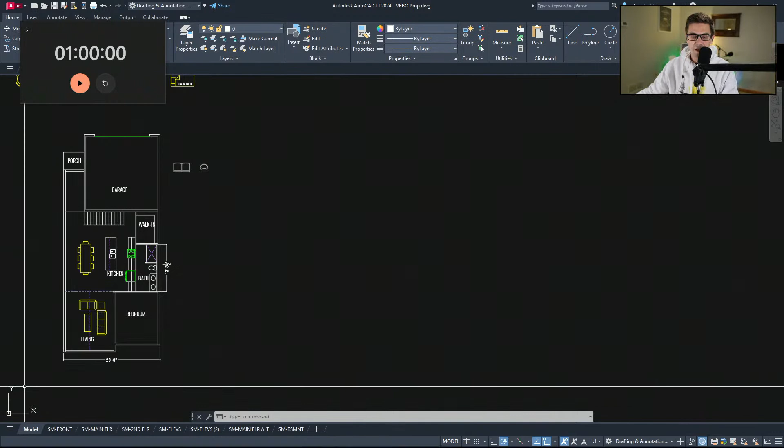We're ready to go. All right, 2-story with a 2-car garage, Scandinavian. Well, let's just start with the garage - 24 by 24, outside dimensions. Pretty good standard size garage for that space.

Okay, and let's show a garage door here. We'll do 9 feet each way, so that's a big 18-foot door. Okay.

Now we need some floor plan. If you're wondering, I've been doing a lot of these live streams, so I have a lot of them all in the same file. Makes it nice and easy to work with.

So we're working on a 2-story Scandinavian, under 2,000 square feet. I'm kind of liking the idea - this just popped in my head - what if we did like a mudroom entry separating the garage? Oh, that's going to be pretty big square footage wise though, isn't it? If we're going to stay under that area, we need to be really conscientious of our floor plan area, because you can't just go all willy-nilly on it.

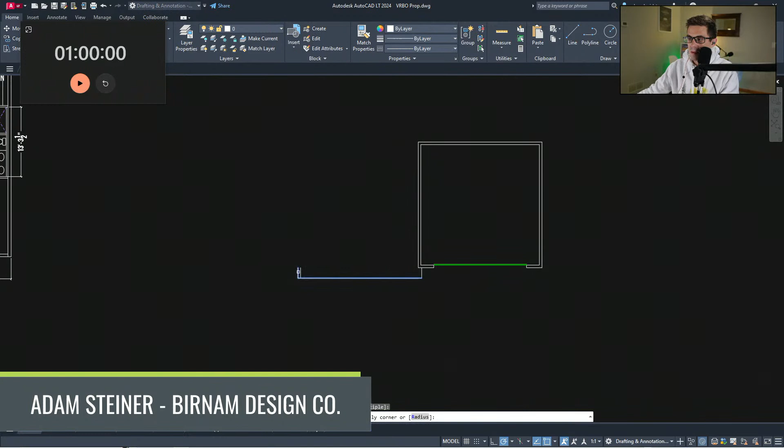So I'm going to draw some stuff.

All right, so one thing I'm thinking - I'll just describe what I'm thinking through. For smaller footprint homes, I'm going to assume you are wanting to be cost effective in your build. We could go crazy and build a multi-million-dollar 2,000 square foot house, but most of the time when you're asking for something square footage wise, you're wanting to save cost too. A big part of saving cost is to simplify the structure - nobody wants to pay for lumber. So let's get the structure as clean as possible.

So I've done a couple of - oh wait, so I'm showing 2x6 exterior walls here, and then a simple main floor layout for this.

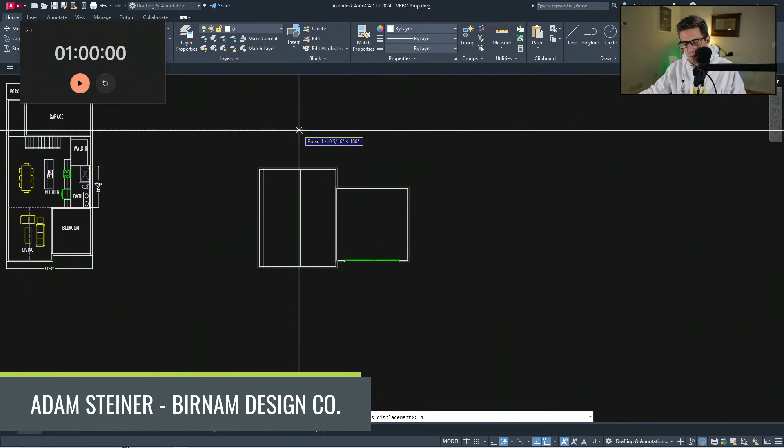All right, let's see what square footage that sets us at - 746. Okay, so we could go quite a lot bigger. And I'm 24 feet that way to that way.

So I'm thinking with these Scandinavian plans, I'll get into SketchUp. Oh, forgot to start a timer - we got to do this all in an hour, partially for fun, partially because Ludwig told me to.

Love the idea of mudroom entry from garage. Yeah, I will try to make that work if we can.

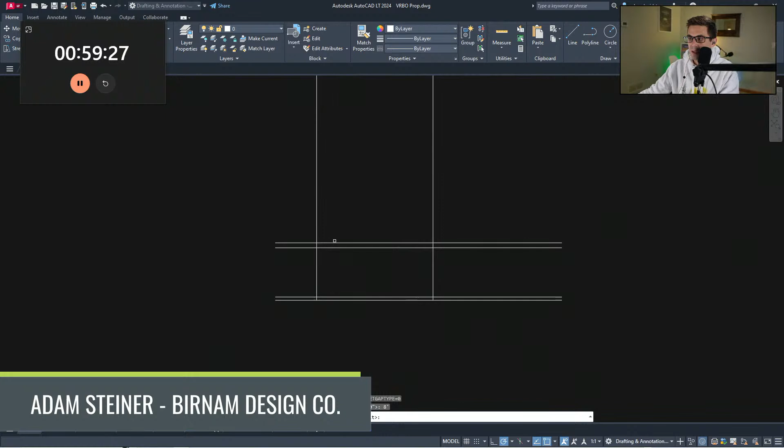Let's say maybe 10-foot ceilings on the main. So I'm drawing a quick section here just to see how it's going to look, because I never want to get too far ahead of my design with the floor plan. I always want those to stay in tandem if at all possible - I think that helps in design.

So even though I'm drawing this in SketchUp later, I'm trying to think out what would be the best way to do this. So I could do garage here with a little dormer on it, you know.

Does that make sense? And have this be something cool. I don't know, Melissa says 2,000-ish if that helps. I mean, bigger is always easier.

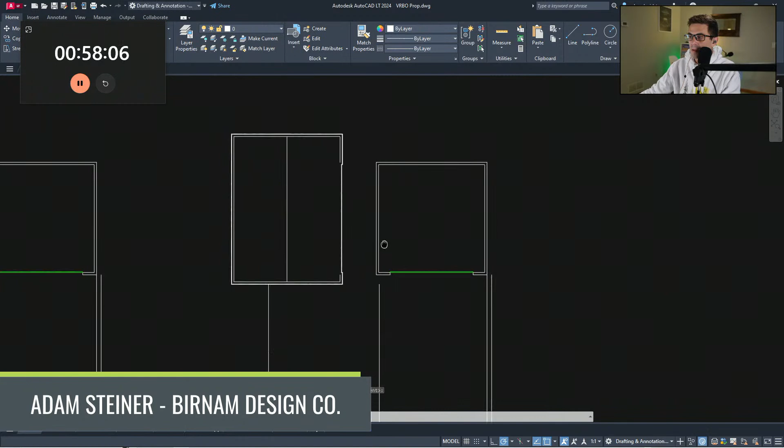But sometimes small footprint floor plans lead to the most fun. So what I was thinking earlier too is, do we separate these components? And let's say here, it's going to add a decent amount of square footage. But if I pull this out, and then do like a breezeway. Not really a breezeway, that's not the right thing.

What word am I looking for? This would be just like mudroom, maybe pantry as well. Maybe this is front porch too. It's not the most simple structure in the world, but what this does for us, especially on this Scandinavian style that we're going for, is now I can do 2 of those roof components like so, and separate that with just a really simple front porch. And then structurally in here, what do we got?

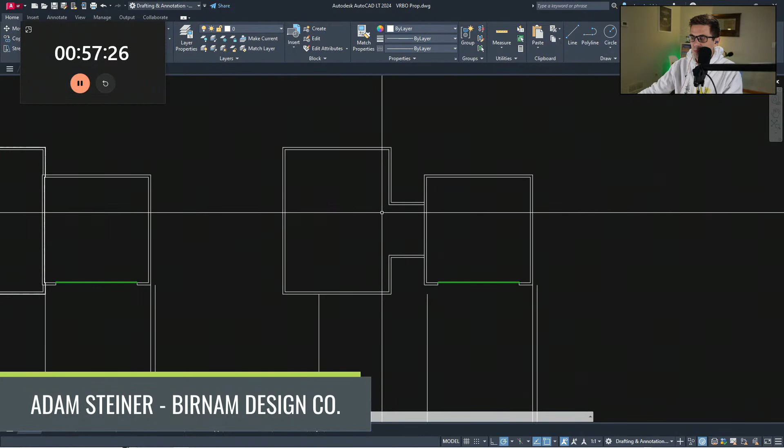We wanted a covered back porch out back too. So we are 23 feet inside to inside. Let's grab some furniture just to start.

How big is this main floor? I'm seeing if it's wide enough to do like the dining area and the great room across the back.

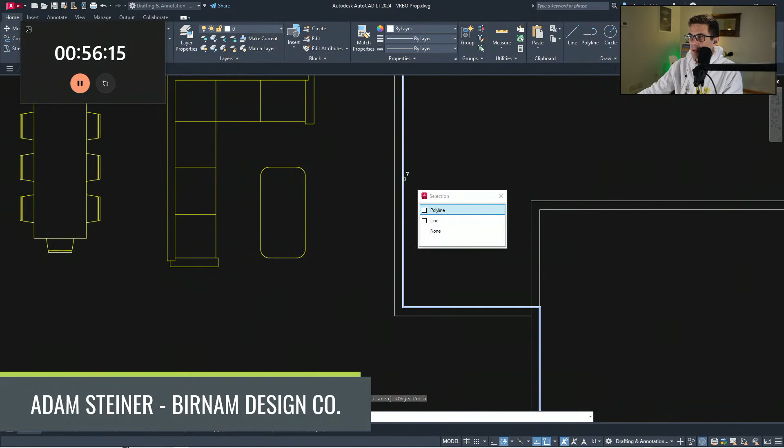862. Okay, we could actually go wider with that. Let's go 2 feet wider, and then we'll go 4 feet back. And then, okay, so that gets us a 1030, just above 1,000.

And then maybe, so coming 13 feet off of the back, maybe 15 feet. Let's start that kitchen.

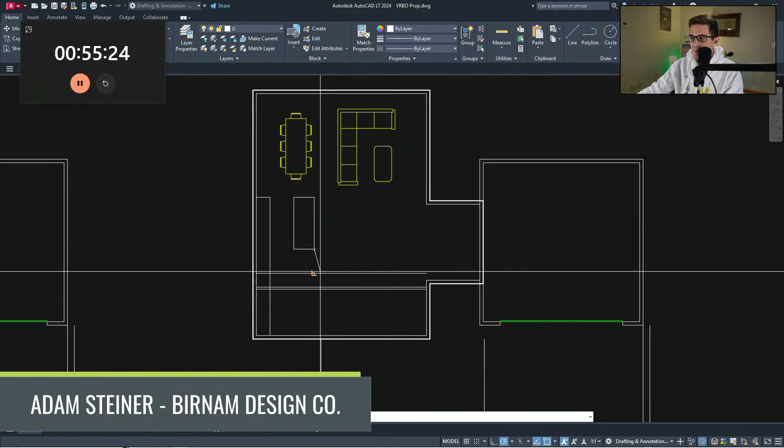Okay, I'm showing 24 inches deep for all the counter space. That's very, very common. And then I'm showing 36 inches for the walkways. That's my personal low end standard, like that's the narrowest I'll show. I still feel like 42 inches though is a really good working width, but on a smaller footprint floor plan, you want to save square footage wherever possible. And so doing something like that will really help.

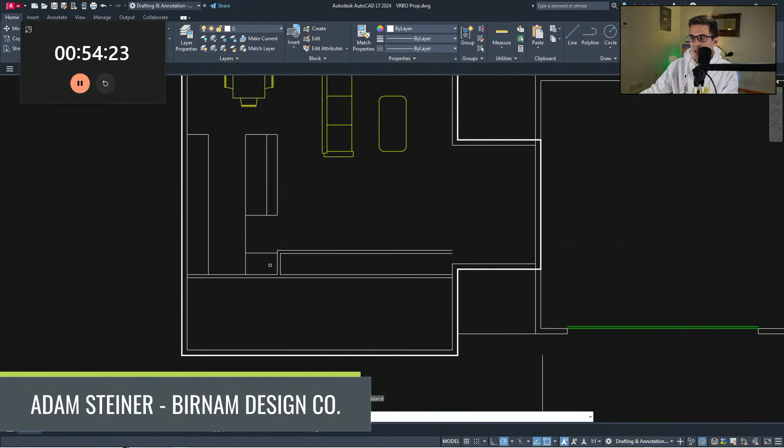All right, so this is going to be combined mudroom. Whatchamacallit? We need stairs. I think this area probably be open to like a pantry up front here. And then if this is our main entry door, maybe we could do office over here and just leave this all open.

Oops, wrong buttons. Okay, let's get some text in here to start to explain what we've got going on. Garage. Mudroom. Little office. We need stairs up. Don't let me forget stairs up, please, chat, or this is going to get awkward.

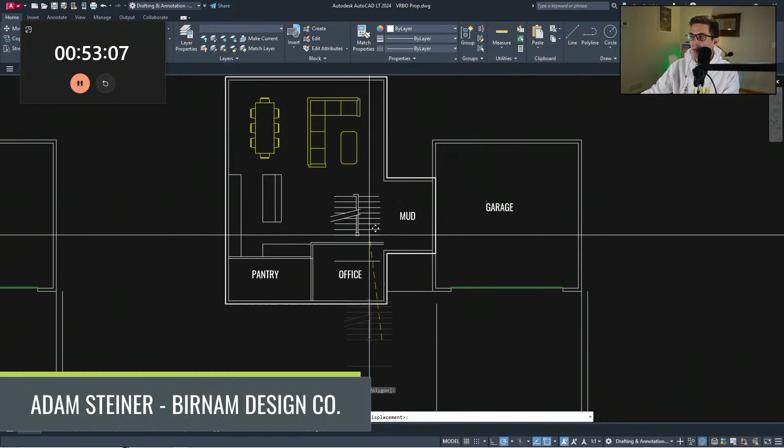Where can we put those stairs? Let me grab a... So I use this room layout guide. I actually sell it on my website, if you like working in AutoCAD or even want a PDF copy. It's got a bunch of options for you on like just my standard, most common layouts and sizes. But it also makes it easy to work with floor plans, because you can see really easily what does and doesn't work.

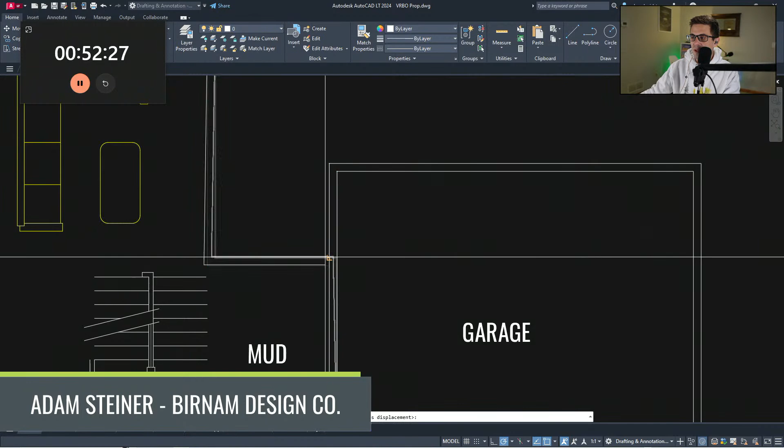So I could possibly put those there, right? Do you have tutorials on YouTube? I wish, that's actually a long-term goal of mine, is to do like a design course, SketchUp course, AutoCAD course, all that fun stuff. If you follow along the YouTube, you can see a lot of these floor plan design sessions, and you can get a decent feel for how I would design things. If you want to go that route, there's a little bit of digging though.

Do I like that? So the stairs be open to the foyer. Foyer mud. No, it kind of constricts the floor plan some. What if we did like a straight shot staircase off this back wall here? No, that's not going to work either. Let's go back to our U-shape staircase.

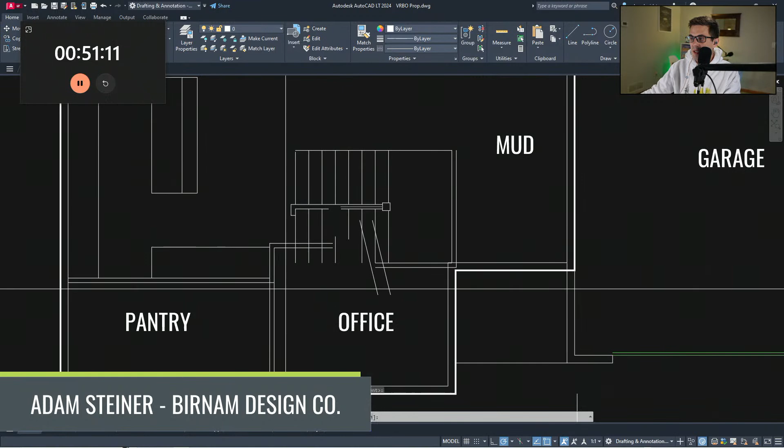Oh, this needs to go out. We slide the door to the office some. That could work, we don't need to pull this wall back as far then. Could be mud entry. And the stairs down, we could either do basement or just have the understairs be a closet if you're not doing a basement. Okay.

So let's see here, let me clean this up for you for a second.

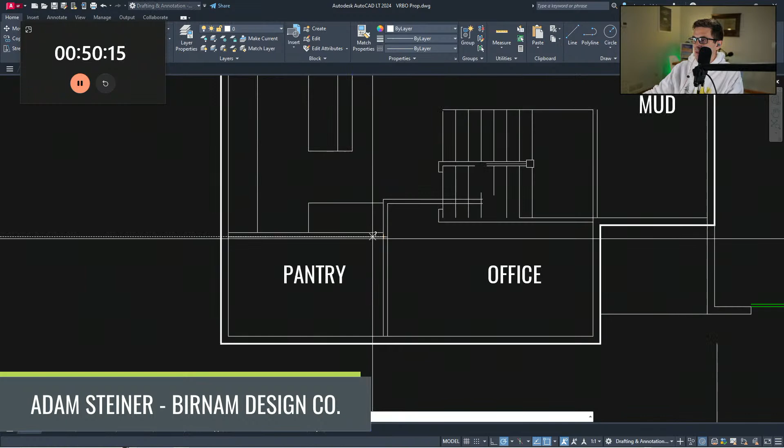That gives us enough room to get into that office. Where would you put bedrooms upstairs? Do you have enough to put a bedroom here? 10.7 by 5. Yeah, okay, we could put a bedroom there. And then bedroom there and bedroom there. It's getting kind of cozy though.

What if this came back just a couple more feet? And this came out just a couple more feet. Could we get it big enough? 9.8 by 5. Could we get it big enough so we could put a bedroom above the office and the pantry? That'd be nice and clean and easy.

18.5 by 5. You could actually do 2x12s through here. You'd have a big LVL though, coming through there, which isn't the most clean structurally, but it's also not the worst. Neither the worst nor the best.

Okay, yeah, let's define our office some here.

If you were looking for a tutorial on YouTube, what would you want? Do you want to know how to work the software? Or is it more important to know good design and stuff, or how to think through structure and roof plans and all that fun stuff? Here's some newel posts - this is what I'm playing with right now.

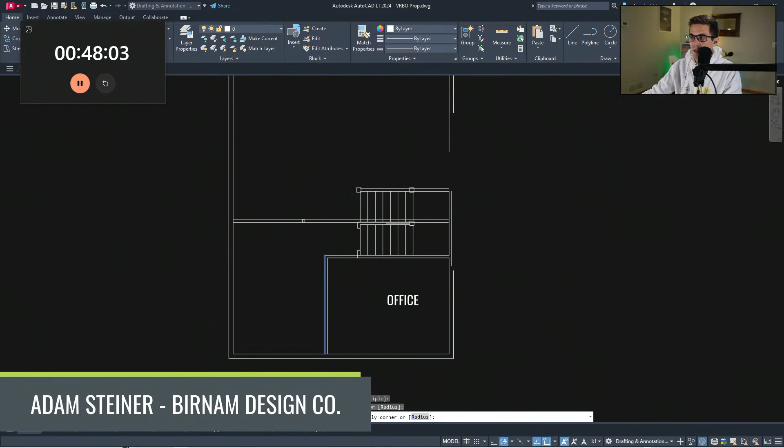Okay, so then let's go upstairs. So then upstairs, we could have 2 bedrooms. Still probably need that little hallway return. So this would be bedroom, and then that would be bedroom. And then we could do laundry right in the middle here.

Oh, you'd actually have a lot of room for then like your primary suite, because it could be all this space. What do we got here? Yeah, 14.1 by 18.2, that's really good. Actually, probably too big for this size house. So maybe something goes there.

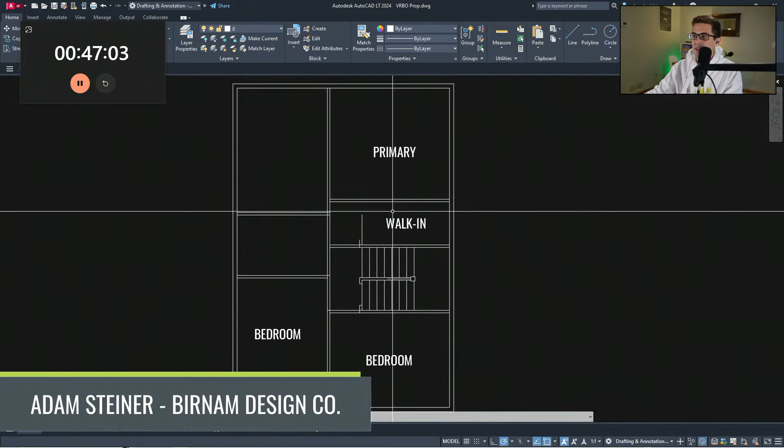Maybe this is walk-in, what do you think? Oh, the bath is huge then. If this becomes walk-in, then this is all primary bath. Oh, you know what?

Speaking of baths, we need 2 more baths in this actually. We need one for the kids' bedrooms. See, going fast, it's easy to forget stuff. So that'll be... oh yeah, we still got room for all this. So that's bath 2. Laundry there.

Okay, that actually works out pretty cleanly. We do need to figure out a space for a powder room. Although the pantry got gigantic, it doesn't need to be that big.

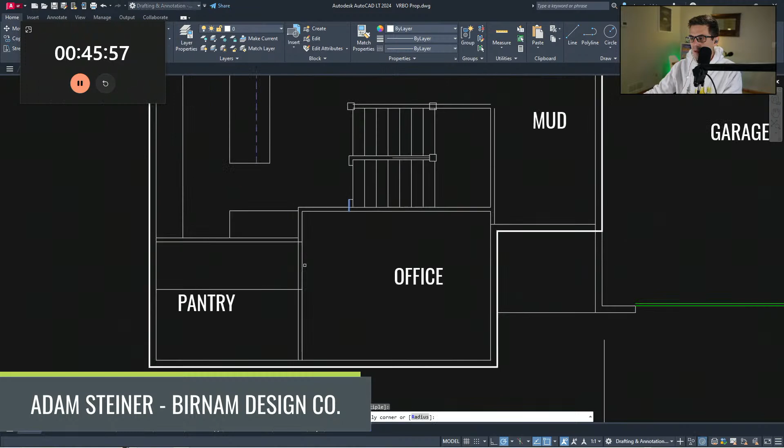What if there's a little hallway coming down here? And then our powder sits there. Oh, I like that, okay. Pantry. Powder.

Thoughts? Love it, hate it. Where we at, gang?

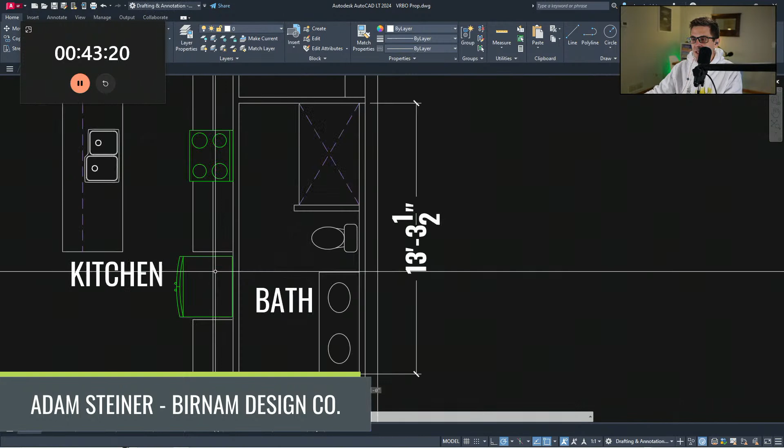Love a Long Island pristine no sinks appliances. Okay, so let's talk about that - I was actually trying to do that in this kitchen, and we have this nice exterior wall here, but I'm running low on wall space. Like, I don't want to put the range here. That countertop is only 5'1", so it's not gonna feel good, and it's kind of far. So I can recess that fridge in a sec. But could we put the sink and range on the same wall? Or is that going to feel weird? Yeah, it is going to feel weird.

There's not quite enough room in that kitchen. I mean, it would probably, like... I wonder if there's a better way to slice this up then. You know, maybe this... I don't know, maybe this area is pantry, and we put the range here. And then the fridge goes down here. That sink goes there. What do you think?

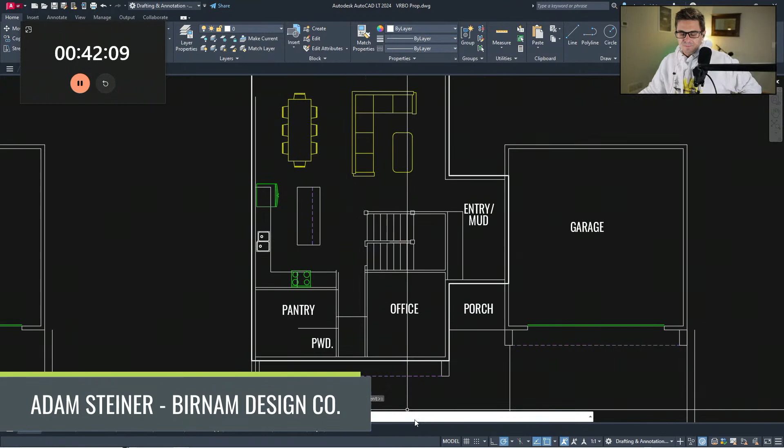Yeah, powder could be right here then. Oh, the pantry is still giant, which I think literally no one is objecting to. I don't think I've ever heard like the pantry is too big, could you please make it smaller? Yep, still haven't heard that in the design meeting.

Here for a giant pantry, says TikTok. Yeah, big pantry is good.

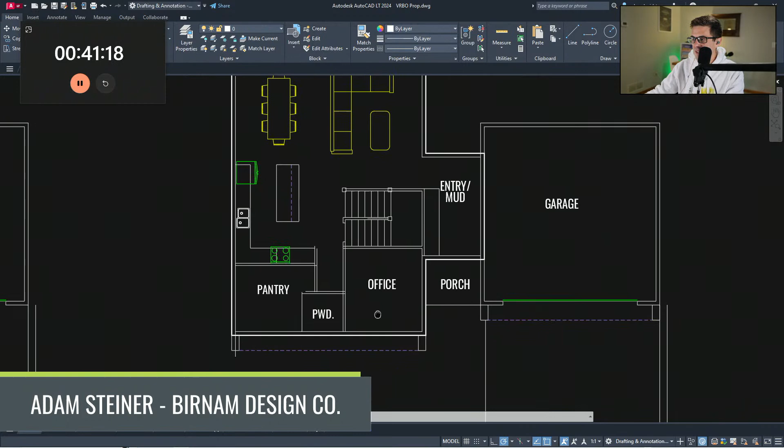Okay, are we approving of this kitchen layout then? Is that better? I do like that. Don't hate it. Office probably isn't going to get a closet, but I don't know that it needs one. 10'3" by 10'11", that's a decent size for a small, modest footprint plan. You'd do a door or window out the back here, and probably another door out the back of your dining area.

Okay, let's see here. These bedrooms are 10'7" by 15. Oh, that's really good size. And then 14 by 10'11". Oh, those are both good size.

So maybe a closet goes in here, front corner. I'm not going to finish these out because I think you get it. You're smart people.

I really want to get to the exterior to show you that as well. I think that could be fun. So we're going to switch to SketchUp here in a sec.

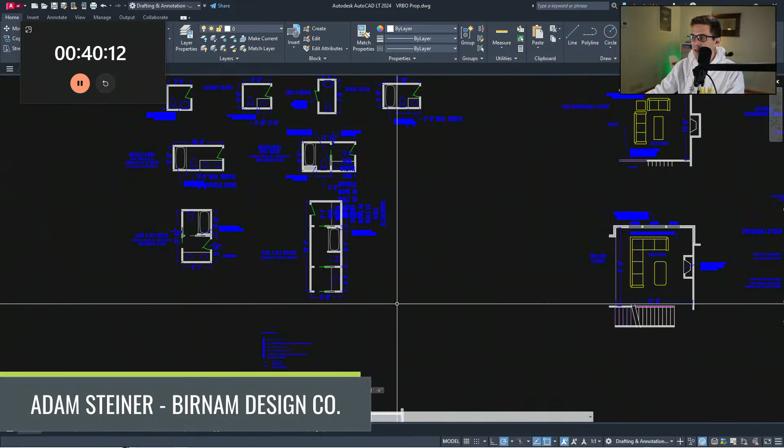So those are closets, bath. This bath then, 10'7", so you got plenty of room. Jumping back to the room layout guide, you got plenty of room to do like a double bowl, maybe even a divided bath actually.

Sorry, those blue icons, it's my standard plumbing icon color. Somebody on TikTok one time was like, yeah, those are super hard to see on the black screen. Oh, sorry.

Tons of room for laundry. And then I'm guessing on this size and type of home, a lot of these were foregoing a tub in that primary bath. This is a really good size laundry too.

Okay. No closet. No closet where? No closet in the bedroom.

Screened-in porch or covered deck. We want covered porch. Oh, you know what I think would be cool here? Is to like make it kind of wrap around, so it connects to that front mudroom area. I won't really be drawing the rear elevation though, so you just have to use your imagination.

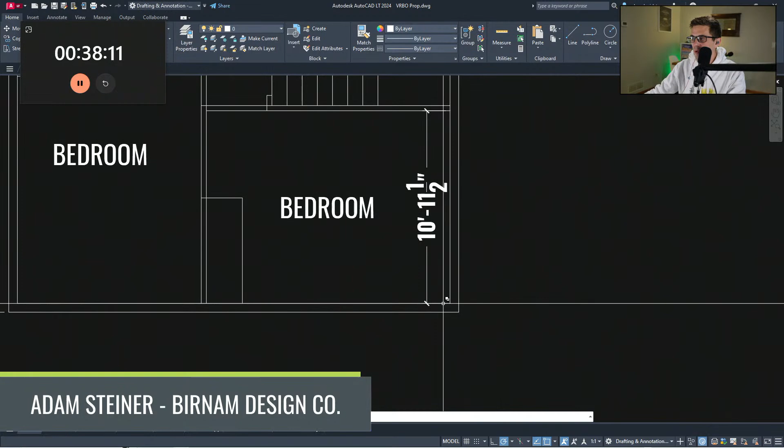So if you're doing like a Scandinavian home like this, we're probably going to do a lot of metal roof, which could be cool. If you're doing the metal roof, you can do super shallow, you could go down to like a 2:12. So that's probably a good option for you.

All right, and then for this primary bath, oh yeah, this is gonna be cool. Just do shower and toilet compartment, back it up on one side, and then giant vanity space on the other. You can keep this open, be like a glass wall for the shower here.

Where are my icons? Please don't protrude closet into the bedroom, you can be more creative than that. I actually think those work really well here and here.

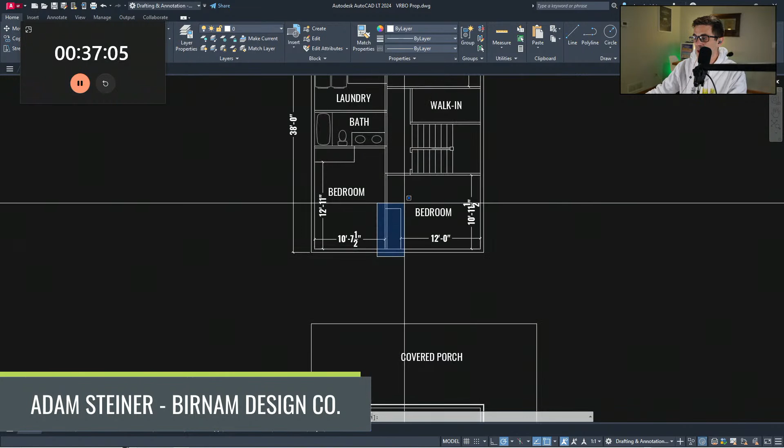Do you got a better idea? Because it'll create, both of these are the entrance doors then, right? So it'll create like a natural little alcove as you're walking into the room.

And then still preserves a bed wall. So the bed wall, let's grab this bed icon. This can be your bed wall on this one, and I actually think this would be your bed wall on this one. Do your egress window at the side there.

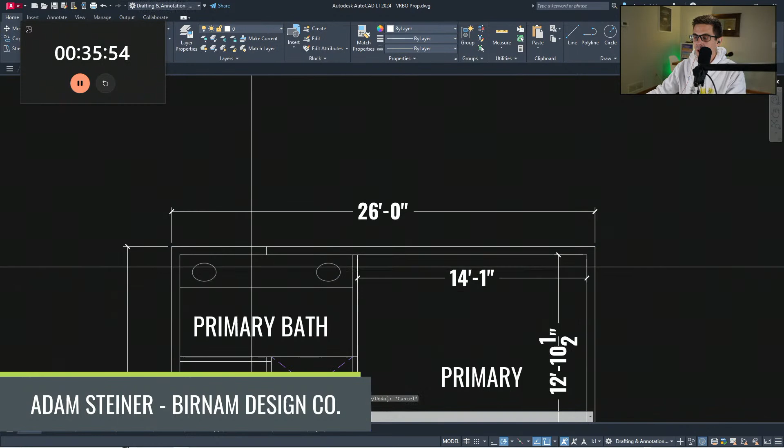And then you could do like a knee space or something in the middle here with a window off that back wall. Or center the vanities, and then do like linen cabinets or closets on the ends. Sorry, distracted by comments.

Okay, did we forget anything major? The only thing I can think of is like if we're gonna need to do a mechanical chase in this. Where would you do one? So it kind of depends on the type of construction. Yeah, because you could do like ERVs and stuff, and not even need to worry about mechanical chases. Maybe let's plan on that, because this is a live 1 hour session. Okay.

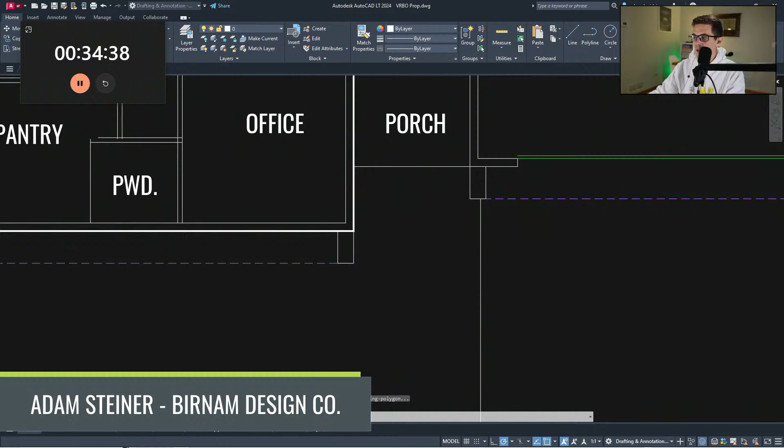Now what I want to do is like maybe a cool big window set here, and then a smaller one there, and accent that whole thing. I'll bring those out, each a couple feet. All right, sweet.

Let's get to SketchUp, gang. Close enough? Everybody can visualize this? Oops, I need to open a new SketchUp. Sorry, let me drag that off, another window. There we go.

So main block of our house was 26 feet by 38. Looking good, says TikTok. Thank you.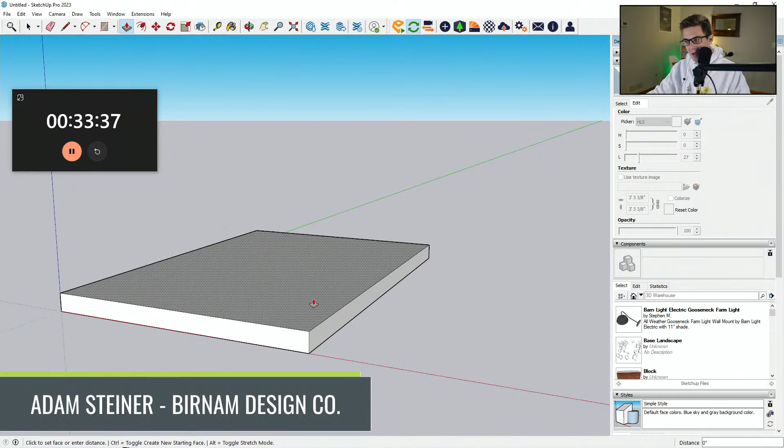Thank you for watching. All right, so I bumped up 8 inches for top of foundation, and then 12 inches for floor area, that'd actually be like 13 and a half. And then, you know, I had mentioned doing 10-foot main floor ceilings. I think because of the stair treads that I have, I'm going to stick with 9, I don't have a ton of room to do extra treads. So 9 foot, and then another 12 inches for joist space and subfloor, and then another 8 foot and 1/8. So that's our top of plate for the second floor.

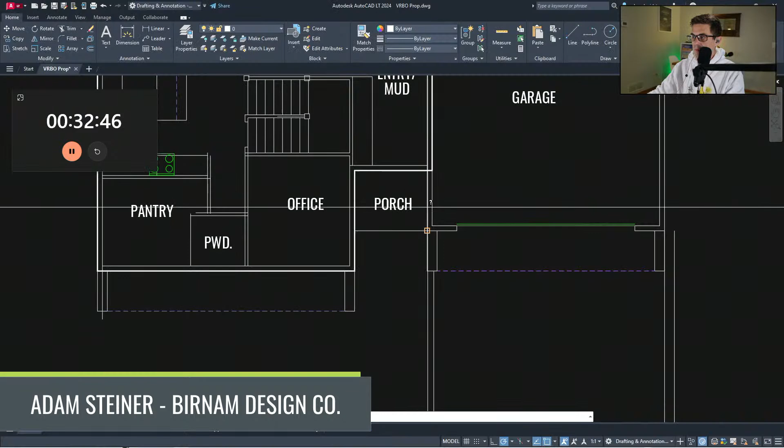Let's jump back over to AutoCAD. Is that right? 7'4" and 10 feet. 10 feet and then 7'4". And then 6 feet and 24. Sweet.

Okay, and I think this was a couple feet in. So again, up 8. And actually, okay, so that'd be our top of plate for first floor, kind of matching a 9-foot plate there.

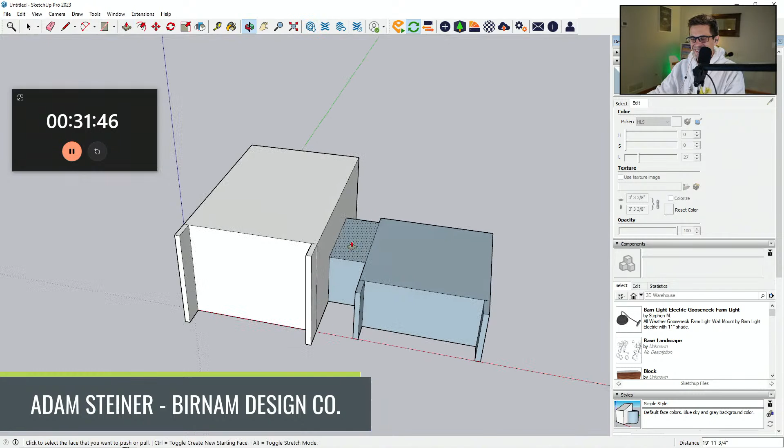Okay, I'm going to bring these out. Little like Scandinavian arms—is that the technical term? Yes. House fingers? Sorry, I'm a child, I know. Okay, got my house fingers.

Okay, and I'm going to do 12-12. I feel like a lot of these plans have a 12-12 pitch. Makes it nice and simple and clean and easy. And I'm actually going to come back through and offset this 12 inches. And then that should get us our main roof line here.

Check it out, starting to look like a house. I always like to go back and delete extra lines in SketchUp because I think it'll just save you headaches later. And I can just copy this. Now that I've made the form, I can just copy it over and delete a bunch of crap. Makes that roof really easy to do. See? Oops, then just have exactly where it was. Kind of a less thinking way to do it. And there we go.

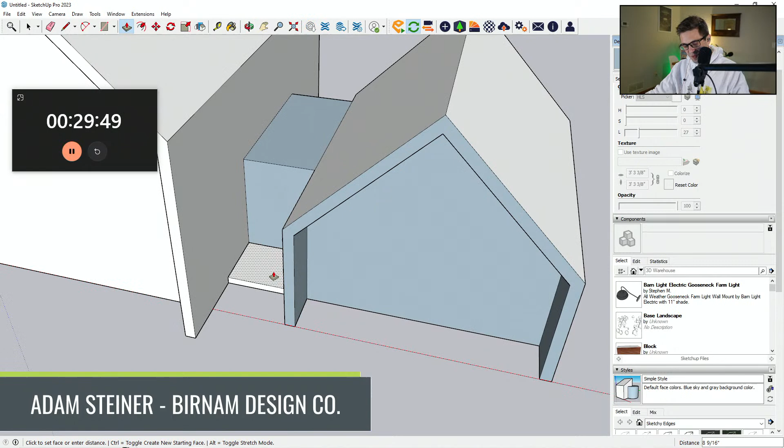This is what it looks like almost every day. The main difference is in a live session I'm intentionally hurrying, which is obvious to everyone, whereas if this were a real client drawing I would spend much more time. I'd go just as fast—I'm a firm believer in going fast to figure out what does and doesn't work—but I'd spend more time making sure the iterations were right. I'd probably draw a couple different floor plans instead of just the one, and iterate back and forth and pull out ideas. So that's the main difference, but it usually looks like this. I'm a big fan of drawing fast, to fail fast, get your ideas on paper. But those of you that follow along, you know that.

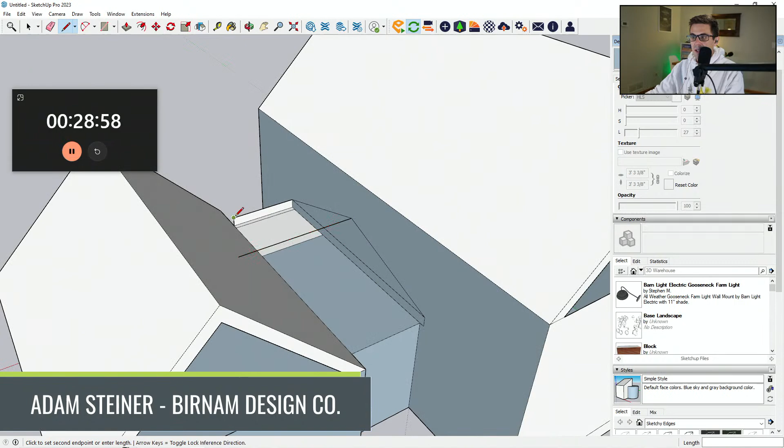Okay, and SketchUp is just like connecting lines—any lines you connect that are coplanar, it makes a face. Even Texas Instruments thinks that I'm coplanar. That's from 5 Iron Frenzy. I'd be shocked if anyone in the chat has heard of 5 Iron Frenzy, but there we go.

Thoughts on making a little loft over the garage and entryway—ooh, okay, I'm going to take a minute to explore that. Oh, there's really no way to get to it. Shoot. How would you do that? Because you're only half a story up here, so you don't have head clearance to cut any stairs or anything that way.

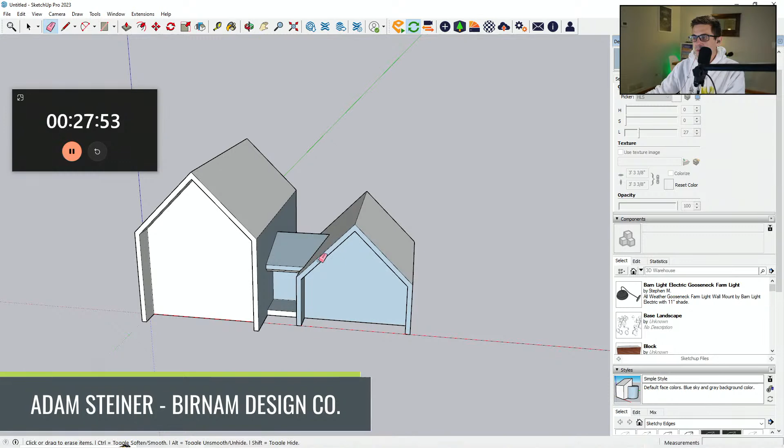And then if you made the footprint bigger, or dropped a bedroom from upstairs, or even dropped that laundry room from upstairs, you could make this a hallway and make the loft area here. And that could be cool. Then you would just—let me copy this over, I'll show you what I think you're talking about. I realize that was an odd sentence now. Let me show you what I think you're talking about.

So you'd need a nice saddle. Actually, I don't want to delete that roof element there. Oops, too far. Yeah, so you'd need a nice saddle coming in there. Ooh, but that could be really cool, come to think of it.

Although, going back to Melissa's initial request, she did ask for laundry upstairs, so I feel like I'm kind of betraying her if I don't do that. But this could be a really cool idea, because then that little loft space upstairs just becomes this little cute little nook.

Yeah, so I think that would work, would be cool. I'm not going to finish that idea out, but maybe in a future live session. Oh, Melissa says love that idea. Okay, maybe I should finish it out.

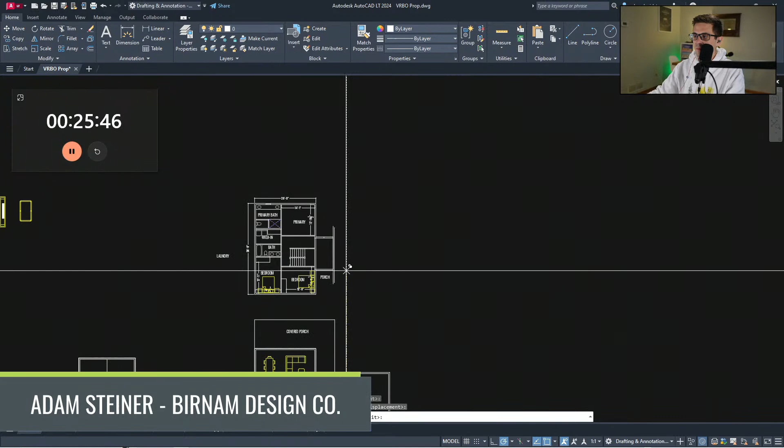Okay, what are we thinking here? Should I keep going on the loft? Where do you put the laundry though? We could do... what would you do?

I don't want to put it against either of these walls because I think you'll need them for windows. That loft would be a really cool space. You could have it overlooking the stairs.

Good idea, commenter. Sorry, I forgot your name. Zach. My brother's name's Zach. You're not my brother, are you? I don't think he has TikTok.

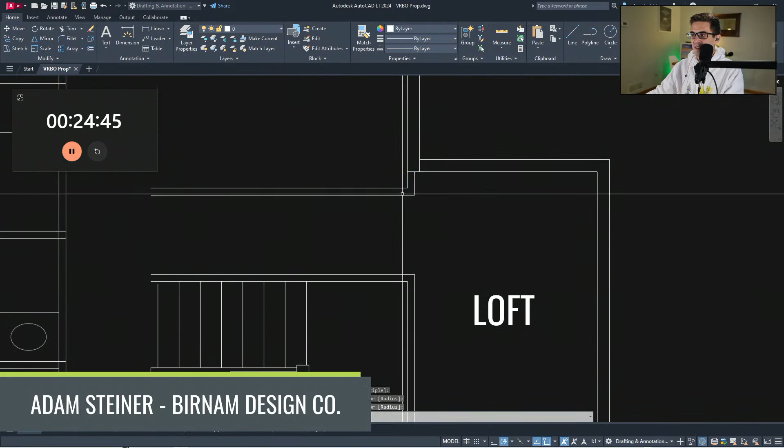Okay, so we did something cool with the plan, but now we lost the laundry room. Huh. What would we do with it? Trying to think here.

Separate entry, not sure where you'd put a separate entry. We'd have to crawl or enter from the garage. Yeah, or we could do... or maybe we just make this all the laundry room anyway. Okay, and then the loft is above the garage.

Is that roof pitch shallow enough? Oh, it is. Let's build all this out.

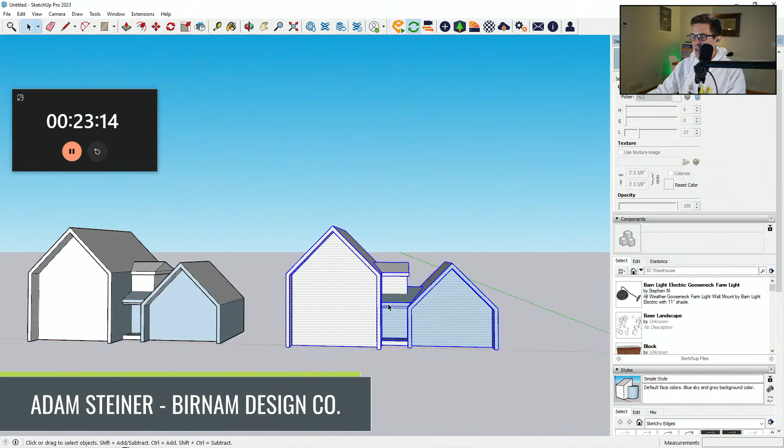So right now, we don't have a ton of head clearance for that. So what I would do, I'd actually mess with the garage plate height. So maybe bring that up another 3 feet so that you could artificially... and delete this actually.

Wonder if... will this let me do it? Oh, it will. Sweet, okay. Don't worry, I'm going to straighten out all these lines. Okay, we're going to do the loft above the garage. You win. It's going to kick us way above 2,000 square feet, but it's a cool idea, so we're doing it.

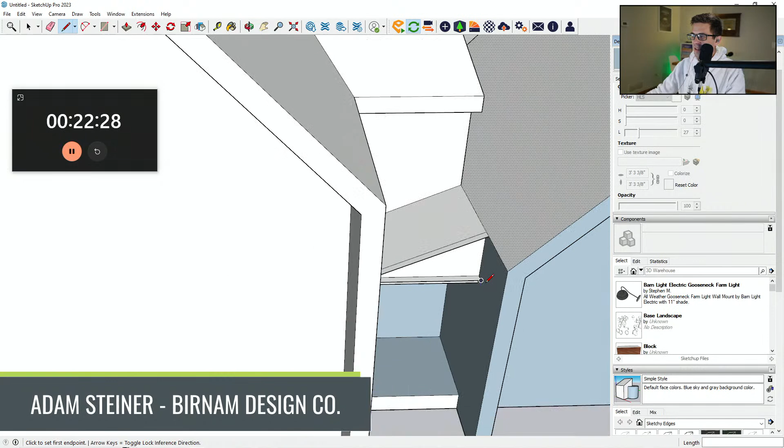And so then, because I kicked up that plate height, we now have a bunch more room for loft space above that garage.

So then, looking at the floor plan, you'd have a room. Let me copy this up. Have a room like here. Fat fingers, sorry.

I once heard Tim Uhler of Awesome Framers say bass player fingers. I think that's the funniest phrase I've ever heard in my life. Also, I play the bass, so there we go. Win-win. But yes, it's true, I do have bass player fingers.

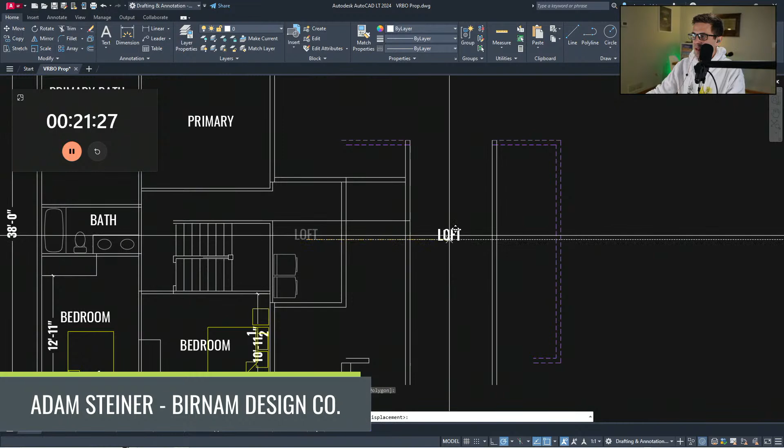So then the loft to be here, that could all be hall. That's walk-in, that's laundry. We get that?

Imagine the space just being storage for Christmas decorations. So yeah, if this is a slab on grade, you're going to need that space. If you're in an area that does basements, then this would be a cool office or guest bedroom or something like that. But I'm not going to get too deep into calculating the exact size and spacing of all that stuff, but it probably works.

Love to be able to have my own home someday. Yeah, it's pretty cool.

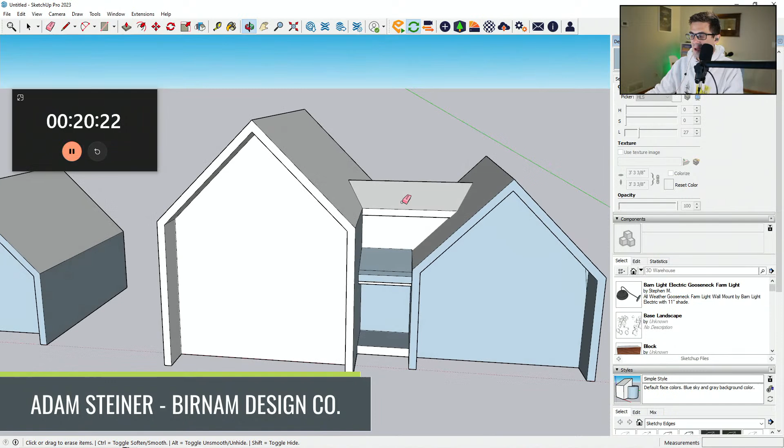Is there enough headroom? Yeah, so headroom here, I'm carrying this 8-foot plate all the way across. And then, yeah, there will be some slope ceiling as you get in there, but there should be about a 10 to 13 foot room in there for shenanigans.

All right, let's throw some doors and windows on this. Start to make it look like something. Explode that, delete that. What's 9 over 8? 1.125?

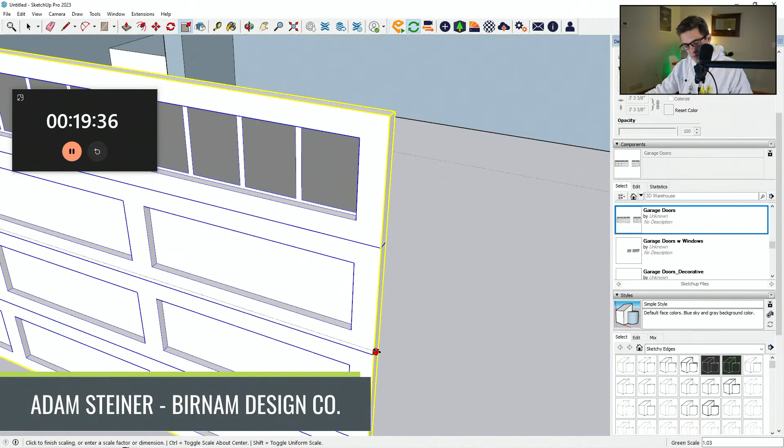Okay, making that an 18 by 8 garage door. Just seems like that's one of those things that's becoming so popular lately. It used to be 95% of what I drew was... I don't like those grids in the windows, though, looks kind of cheesy.

Used to be 95% of what I drew was, whatchamacallit, 16 by 7 foot garage doors, just like the air quotes builder standard. But those are completely gone now. Pretty much nobody does 16 by 7 standard garage doors anymore.

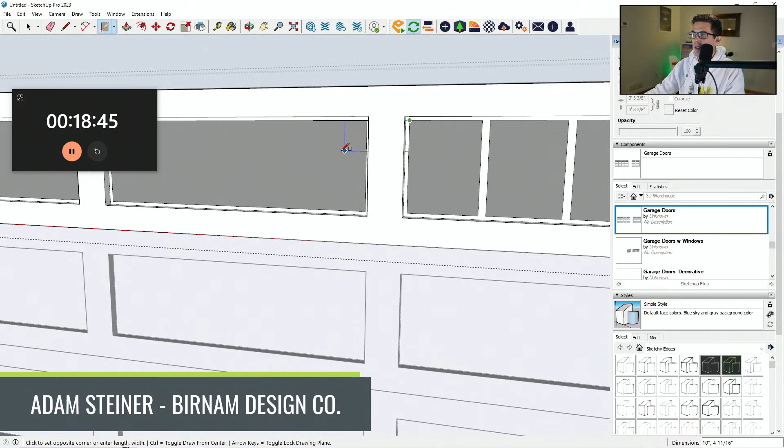Okay, did I design my own home? So I've designed my own home that I lived in twice, but we sold both those. Then we moved to Minnesota and then back to Indiana. And by the time we moved back to Indiana, my wife was like, can we just get something and not do the whole building process again? Because she'd just done it a bunch, and a bunch of moving and all that stuff. And I was like, yeah, that actually sounds kind of nice.

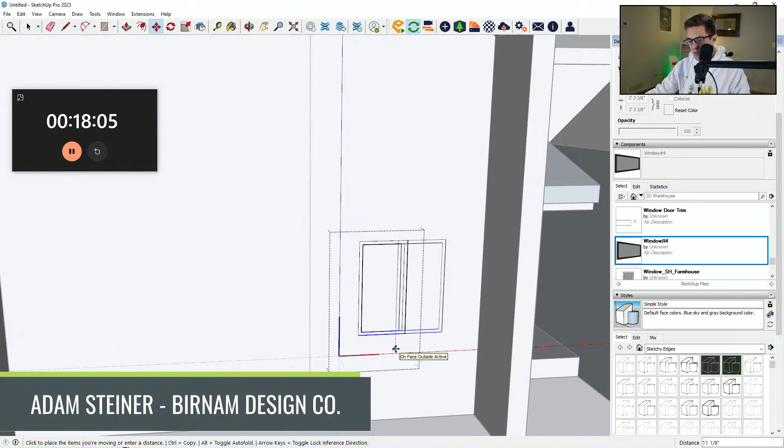So we just live in a random 90s two-story now, and I'm not gonna lie, I don't hate it. We have golden oak cabinets everywhere and golden oak flooring and all that fun stuff, and oak trim. Did I mention the oak trim? There's a lot of oak, guys. But yeah, it turned out to be a cool house and really what our family needed.

But yeah, designing your own house is cool and fun. 5 stars, would recommend.

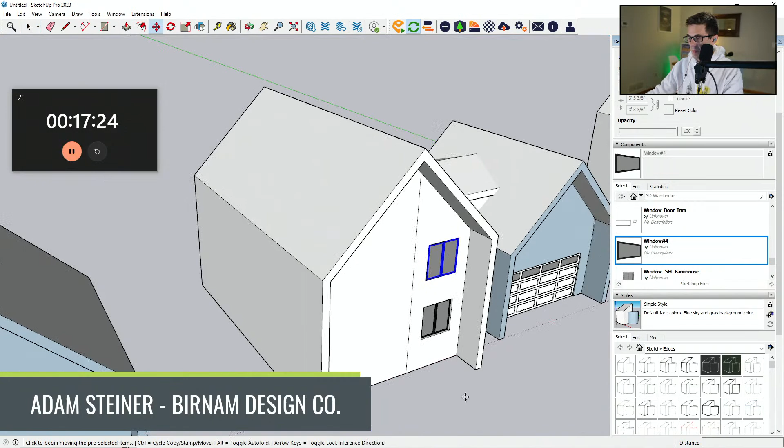Okay, now for some smaller windows, I think. Let's make that unique. Bring that back down in size.

True story, before we built either home, our existing home that we're in took a long, long time to sell. And I would just work on my plans during lunch breaks. I had hundreds, maybe thousands of alternative layouts of things I wanted to do in the house and plan. That's good news and bad news - you're not gonna get it perfect, and you can take some solace in that. You're just gonna miss stuff, and that's okay, everybody does.

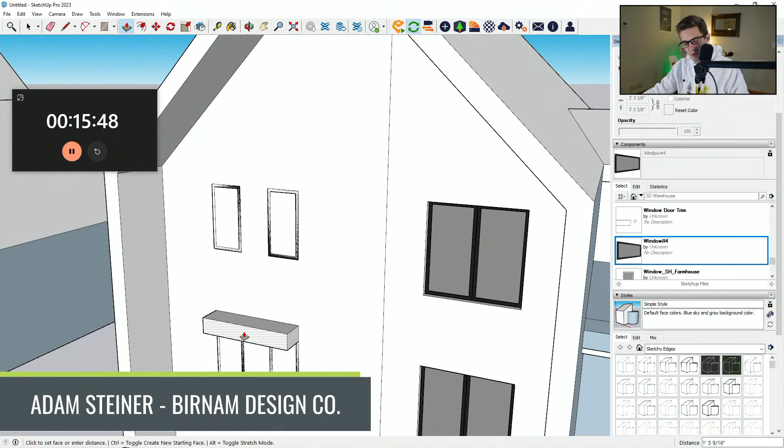I think planning and prep is awesome, but don't stress yourself out about the planning, because it's impossible to do it perfectly. And if you think the planning would stress you out to the point where it would be dysfunctional, then maybe don't build. I know I'm not really supposed to be the 'don't build' guy - that's kind of my livelihood - but I'm serious, I don't think home building is for everyone. I think it's good to assess that before you go into the biggest project of your life.

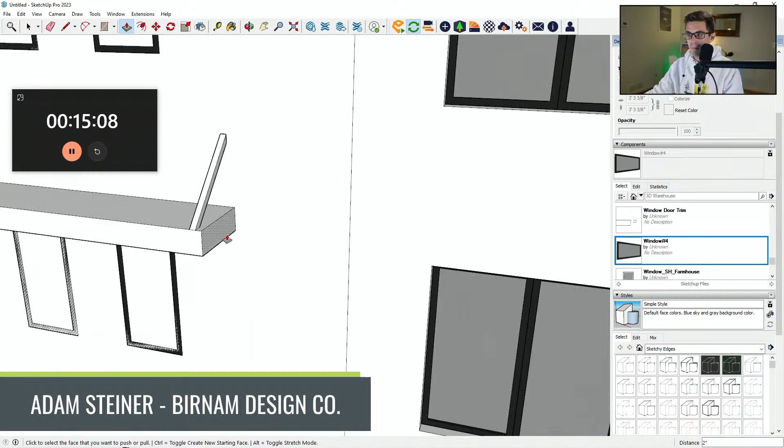I can't tell if I love this song or hate it, but... oh wait, I wanted to make that a group. But it's still on my playlist.

Even on an architect's salary, I'd never be able to afford it anyway, unless I moved far away from any job.

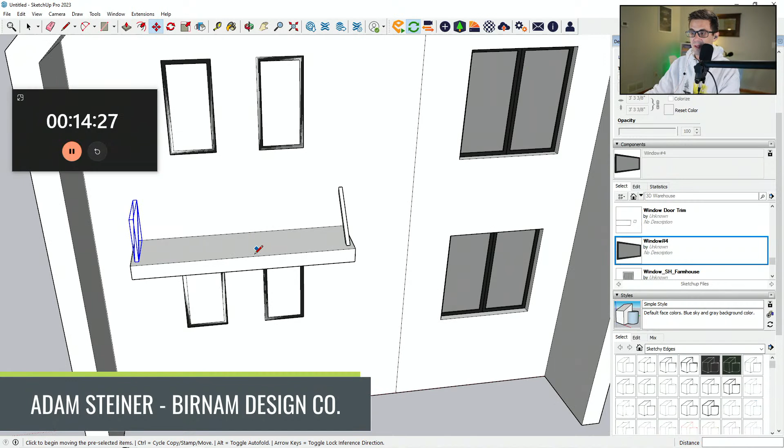One cool thing is with this career you can seriously work anywhere. But I'm often saying, on average, I'm designing way nicer homes than what I can afford. I think that's pretty normal.

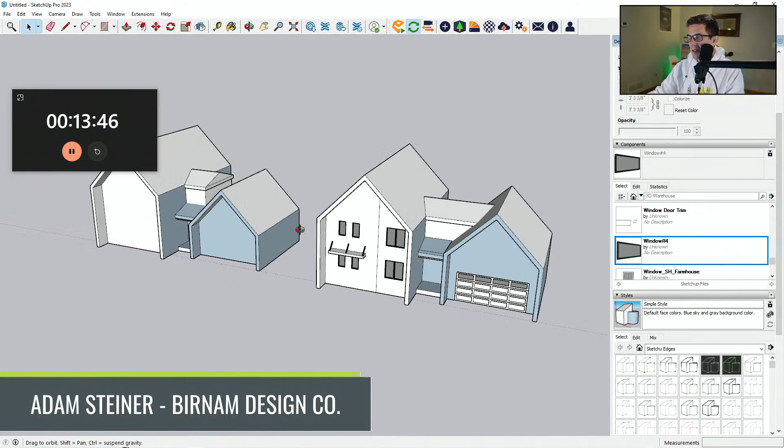Okay, so these windows are in our bedroom and below in our powder room and pantry. If you're just jumping on, we've been designing a floor plan from scratch here for you in AutoCAD and Sketchup. We're on the Sketchup portion now, got 13 minutes here to finish this elevation, hopefully. Making a front door now - I'm just gonna do a full light front door, I think that'd be fun.

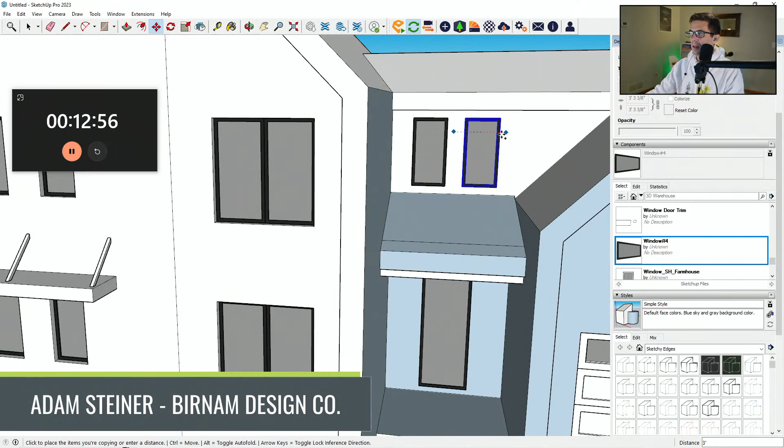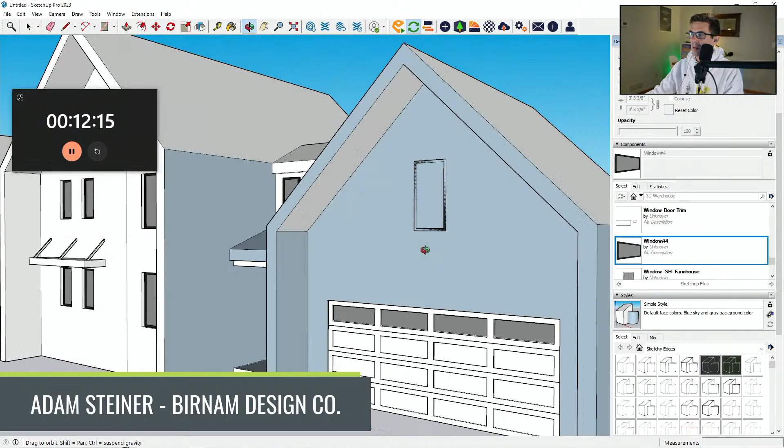Do a little triple window up here. Oh, maybe double. Yeah, double, I'm gonna stick with double - final answer, phone a friend. Where is the center line of this bay? Oh, we could use a bigger window in there - definitely. So that'll be our loft space.

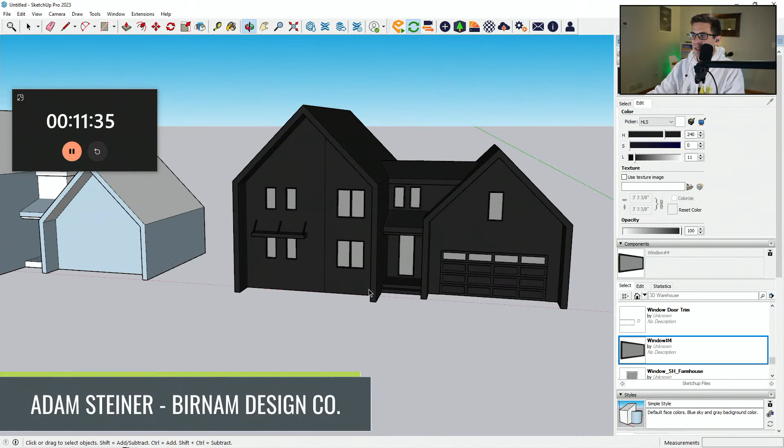All right, now let's paint this thing. Maybe even render it - you guys want to see it rendered in Enscape? Okay, gonna change our garage door to black. I've been on such a moody color scheme kick lately, and I really am not apologizing for it - loving all the dark siding and stuff. Let's throw on a metal roof. Nice red color - that's a joke, I'll change it.

Okay, and then let's import some materials from Enscape.

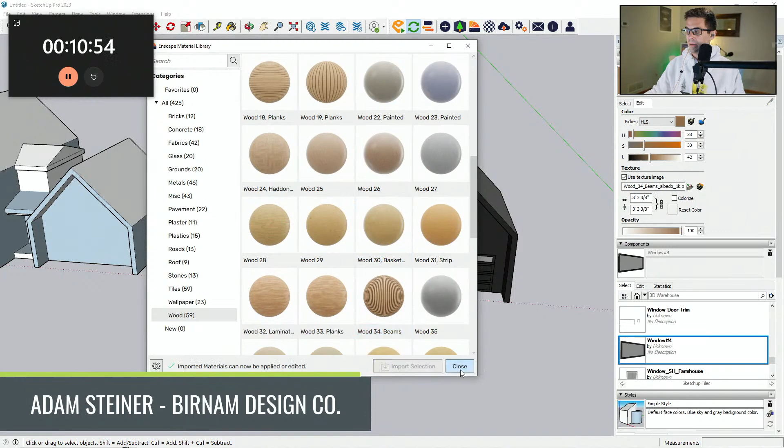I'm in an interview this week with a local firm. I'm so worried - an interview for an architecture position, I'm assuming. If so, that's cool.

Wood on the underside of roofs - yes, great call, doing it, like this area here. Love it. All right, and then let's do - because that wood stuff is going to be expensive - let's do some just field siding to fill in the areas, hopefully offset some of that cost. Don't worry, that's not going to be white either. Going to decrease that size though, to feel more real.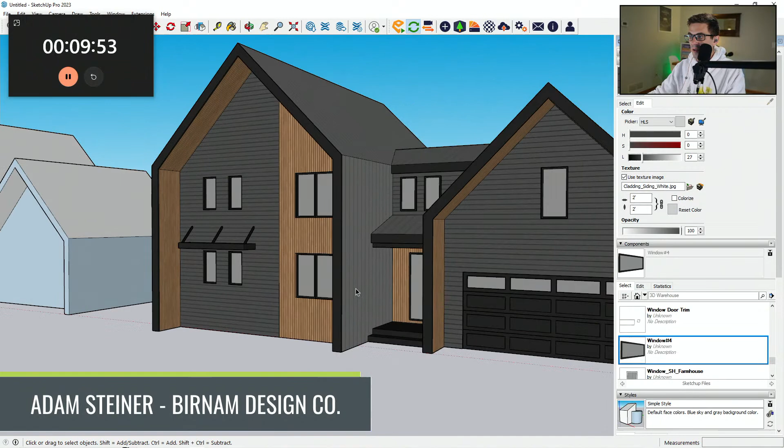Bump that in so there's like a little reveal there - could look cool. I think we're close to rendering it. Draw a driveway. Yeah, let's just make it, we got time for Enscape - 9 minutes.

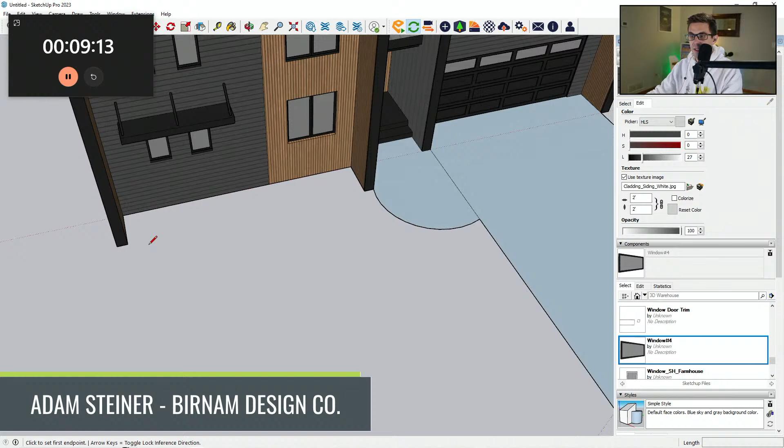All right, there's our driveway, front walk, little landscape area out front. Didn't like that though, I'll do that instead. Okay, all right, I'm gonna move these way out of here so they're not in frame. And then draw our land.

Bump that down 4 inches so that you have some reveal between the concrete and the grass - just one of those little details that helps it feel real.

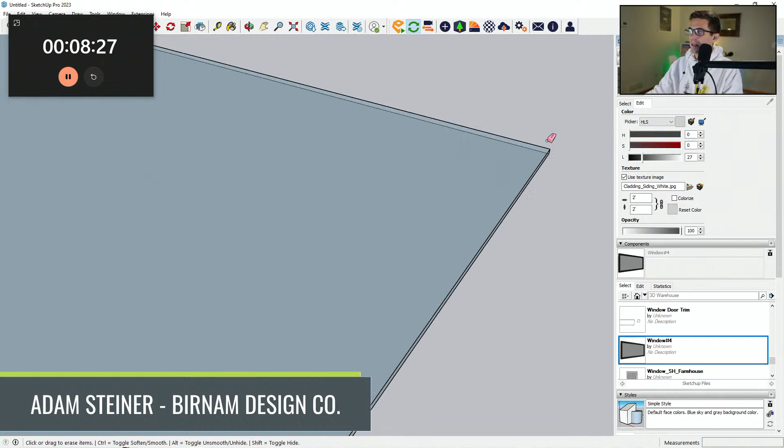Third material might be too busy. Yeah, it might. I could see an understated stone or brick, just something real simple. Like if you did a black brick, could be cool, just like on this face. I actually really like that.

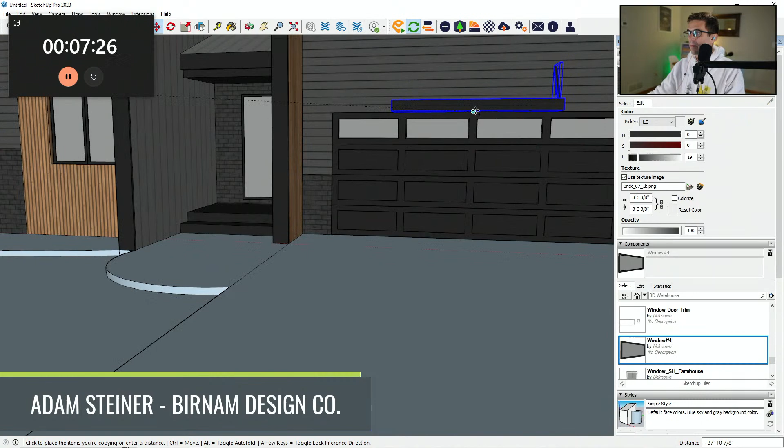If this were an official rendering, I'd probably add a little more detail to the exterior lights, and maybe there's another header doodad above the garage door. Actually, let's show that - I think that could be cool. And maybe some brick sills separating that piece.

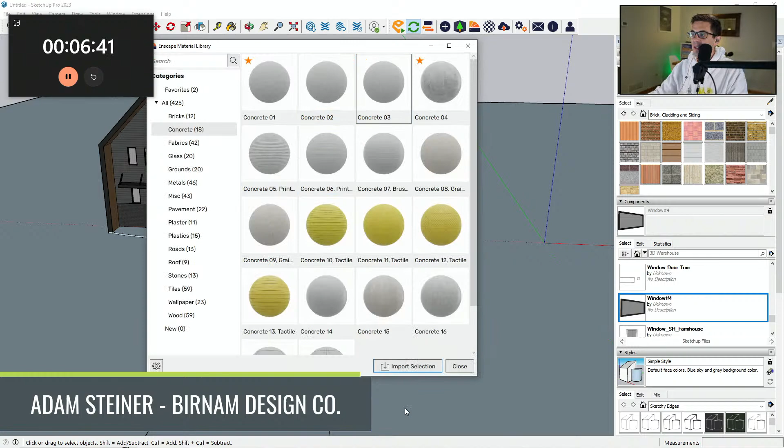But also, you'll notice these overhangs are very, very simple. I like to keep - sometimes in the rendering you'll notice you could oversimplify and you just can't pick up on it. It's almost impossible to really tell - now that you're looking for it - but the cables holding up those awnings, in theory would be circular cables, but I've made them rectangles, and I don't think anybody would really notice if I had sent that rendering to you. Okay, 6 minutes, speed time.

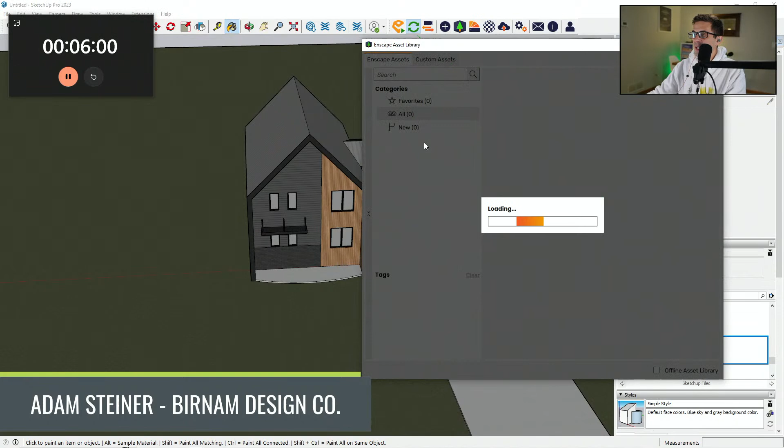Some pebbles, need some landscaping. Oh, back to the lot size. So I rarely draw renderings with the actual lot size in mind. I'm drawing it so big that I can hide the horizon line. Just one of those things that I think helps make it feel real.

Do you have any designs to take advantage of views? 10 acres in hill country. I mean, yeah, I think most of my designs are intended to have some sort of view somewhere, right? So usually big open windows at the back and stuff, but I'm guessing you're probably wanting like...

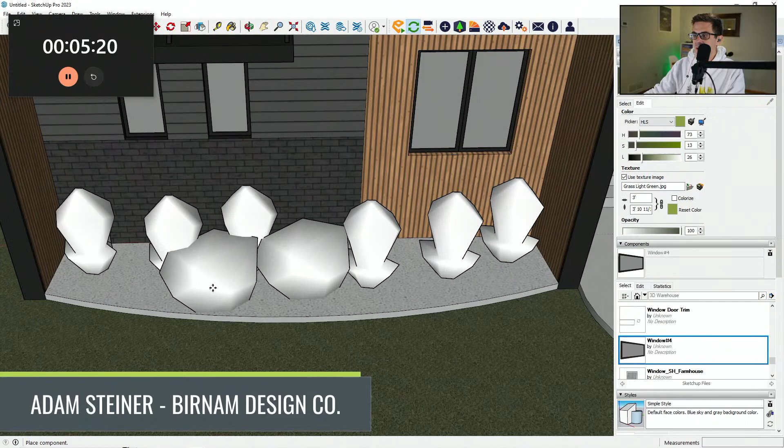I'm not a landscaper, by the way. I don't know if you could tell. I just do enough to be able to throw these on here. All right, let's get some trees.

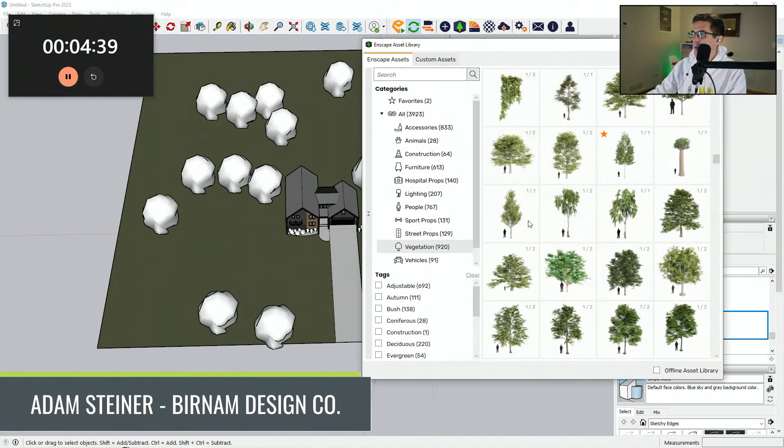So I want a smattering, again, hiding the horizon line, and some in the foreground and the background. Enscape does this cool thing where it lets you set the focal length of the camera shot, which can be really cool because it helps a lot to have stuff really close and really far, since it'll get more and more blurry as it gets further in the background. These are good horizon-hiding trees. Also, I want some stuff in the foreground so you can see those trees in the reflections of the windows and stuff. That can help with the realistic feel.

And I'm not going for hyper-realism either, that's rarely ever my goal with a rendering. I'm looking for client buy-in, something to show them and say, hey, are we on the right track or not? All right, Enscape time.

Cylindrical objects are so hard to rotate, I was having a rough time with them. Yeah, that's back to the cables on those awnings. I rarely ever show a cylinder because it's so much more modeling power, and it gets real funky.

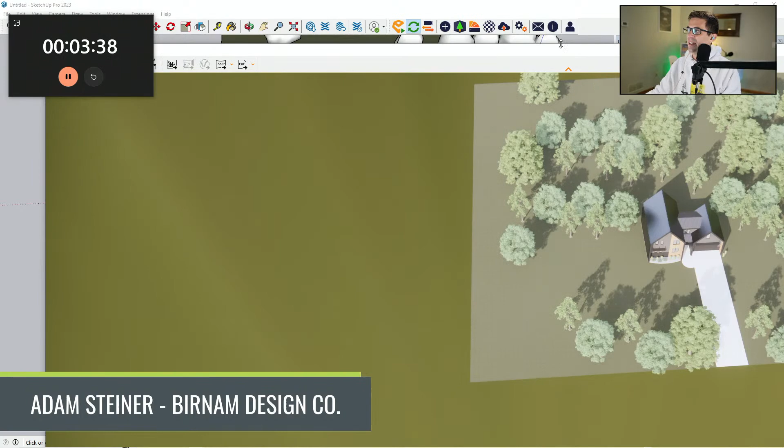All right, moment of truth. What do we think? Would you live there? Yay or nay? I'm digging it, I think I would.

Oh yeah, I was gonna show you setting the focal length, so depth of field. Crank this up, you'll notice the house stays very crisp, and then stuff in the background gets more and more blurry.

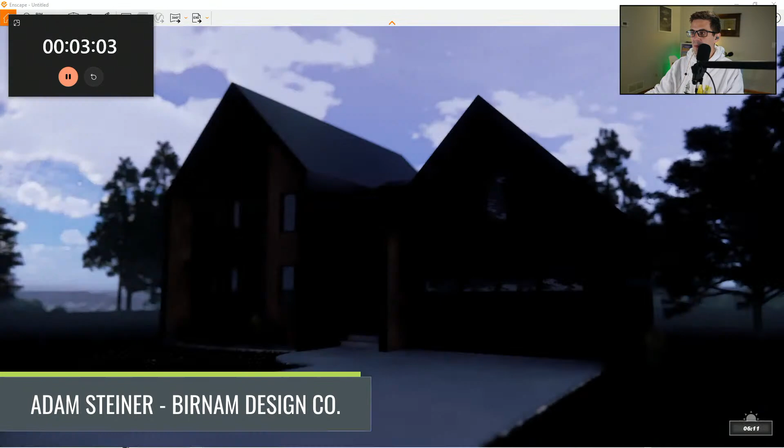Too big for me, says Mark. Yeah, I think we're a little bit above 2,000 square feet, going back to Melissa's initial request. But I'm liking it. 2 minutes to spare too, check that out, cool.

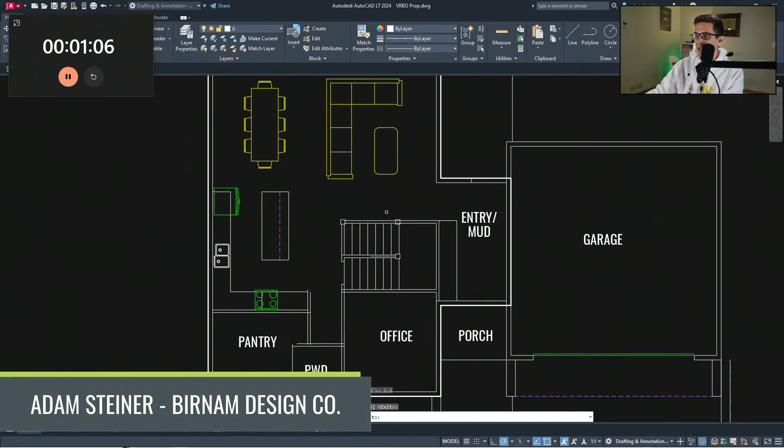Stairs up here with open rail going to the second floor. Either an under-stairs closet if it's done slab on grade, or stairs down to the basement there. Walk-in pantry up front here, powder room there, this might need to be used for mechanicals. I don't know, maybe just throw your furnace in there if you're doing slab on grade, or like we said, do mini splits. And then it gets real simple.

We did this little loft space above the garage, put the laundry above the front porch here. This kicked it above 2,000 square feet. But 2 bedrooms up front sharing a bath here, and then primary suite with the walk-in primary bath off the back.

No substitute for true flame. Yeah, I get it, although the electric fireplaces are pretty cool, and huge space savers.

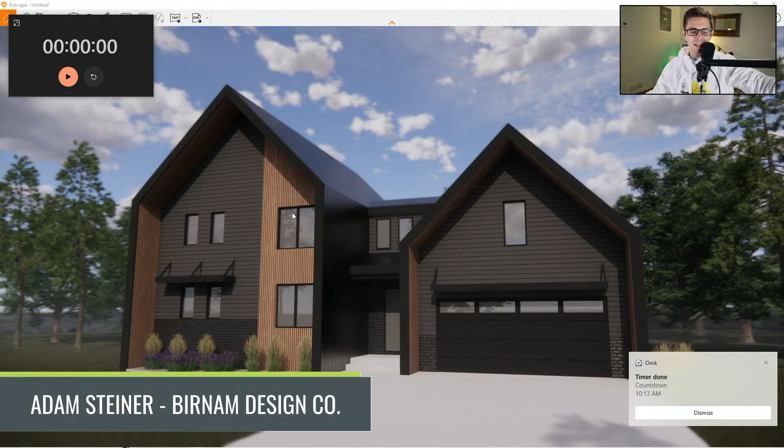I forget how to stop this timer.